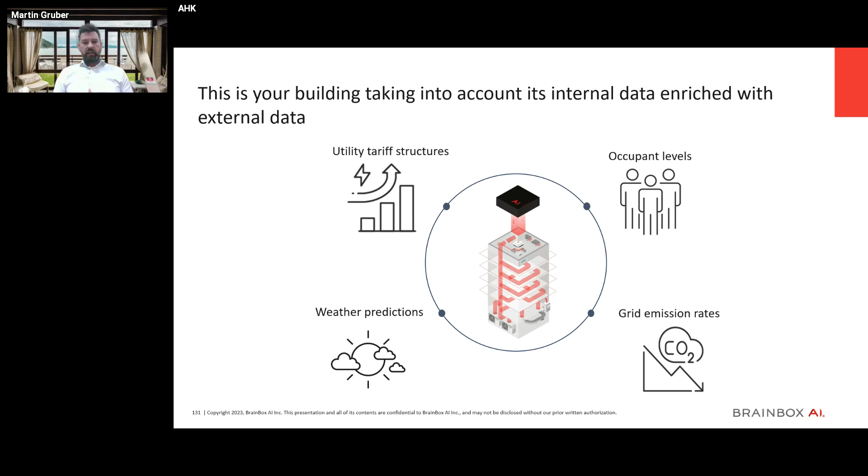Efficient way to get to the temperature which you want to have in the zone. So, for example, if you want to have 21 degrees in your room, we find a way to get to the 21 degrees as efficiently as possible, and that's the key thing. How we can optimize the energy consumption. Next slide, please. By turning equipment on and off if it's needed.

And finally, this has a huge impact on 4 different levels. First, we have the capabilities to decrease the carbon footprint. The standard is between 20 and 40%. Increase the life of HVAC equipment because we use it more efficiently. So that means you have a higher lifetime value.

Improve the thermal comfort of your building, so we can make the building more comfortable and have a better CO2 and humidity level. And then finally, reduce the total energy costs up to 25% related to HVAC.

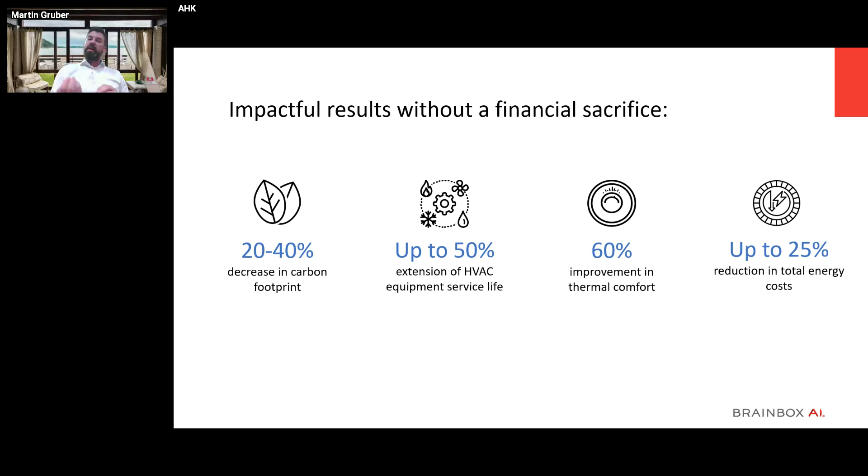Next slide, please. And then another thing, and again, Stefan mentioned that today, it's demand side management. So what we can do is we can use the technology and make buildings work together in order to predict the capability on the grid and do proper load balancing, avoid peak times, and so on and so forth, by shifting the load and the demand accordingly. And again, this is where we use our technology supported by cloud and AI that helps us to make the building more intelligent. Next slide, please.

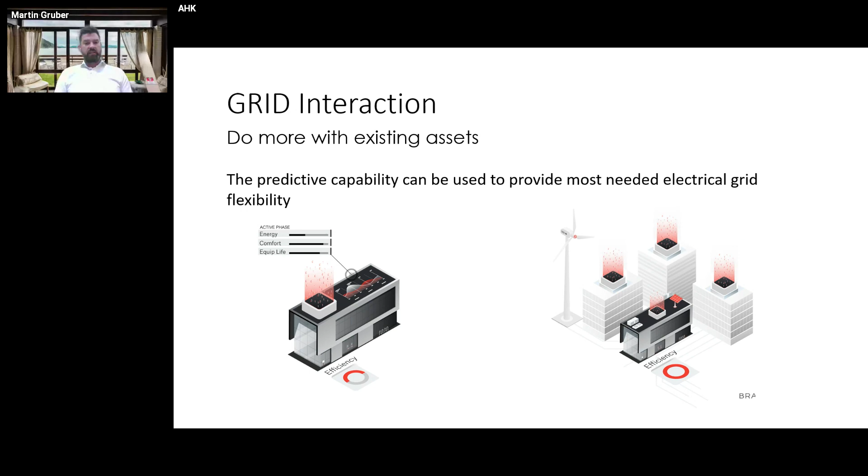And where we do that, I think that's a very significant thing, is we're dealing on a global level, having an impact on hundreds of buildings globally. And we're increasing our footprint heavily, and having headquartered in Montreal, we do have 160 employees focusing on making the world more sustainable with our technology.

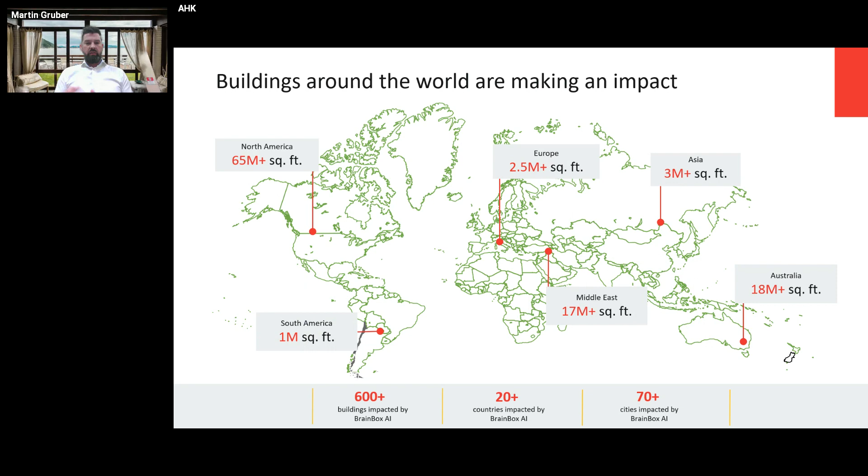And finally, I brought up one concrete example just to give you a feeling. It's a building in London where you see some quite significant numbers, how we can achieve the savings. And the interesting part is, as it is a software as a service, you have no upfront investment cost. You plug in our technology, we charge per square meter which we control. And finally, you're gonna gain the first savings after a few weeks after installation. And that's a key thing as well.

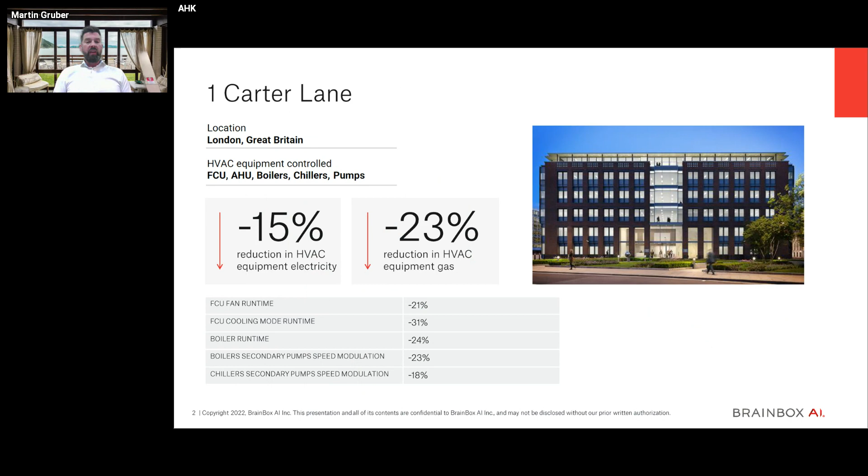What we learned in the last conversations is that speed is very critical. And besides the technology, we want to bring that speed to the market as well to make a fast impact on the buildings. Next one, just to give a feeling, this is what I said before, this is an office building. The right one is a retail building.

So we really see that, especially in the retail space, the cooling demand is increasing. So that's why obviously our impact has to be better and better, as we increase the cooling demand in buildings because of the higher temperatures, we need to have an impact on that, and this is where we can heavily influence. And there is office and retail as a huge gap to fill.

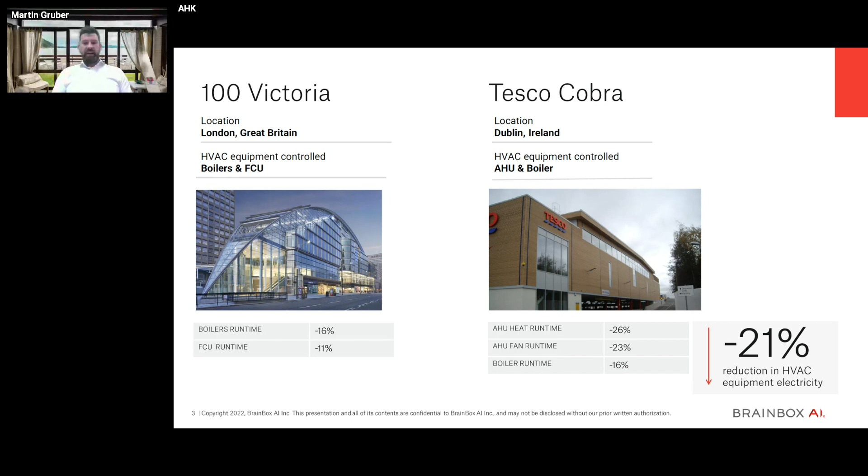And let's make the buildings smarter, greener, and more efficient, starting today.

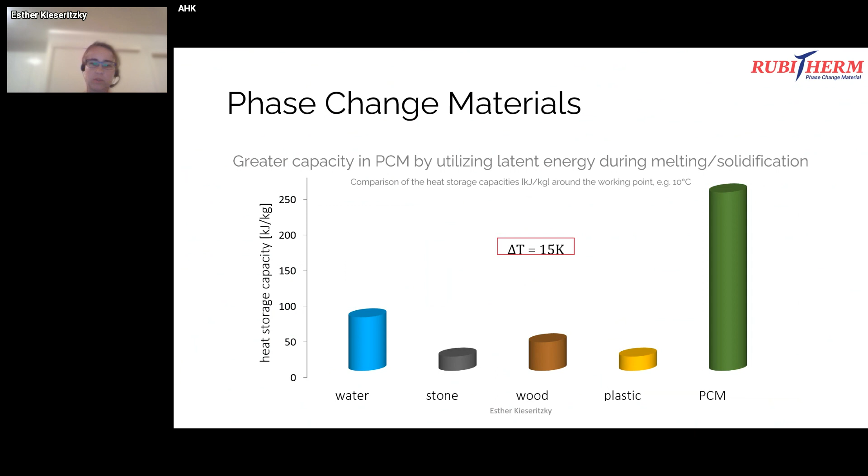So yeah, looking at the kind of materials we are using, in principle, almost all materials have a phase change at some point. What we are looking for here, especially in the range of building applications, is maybe phase changes that happen between -10, -20 degrees and +50, 60, 70 degrees Celsius.

And here we do have two product groups that are usually mentioned. Those are ones of the organic kinds, so they are similar to waxes if you touch them in the solid state. And the inorganic class contains mostly salt hydrates. Well, all of them liquefy during phase change, and as we don't want them just running away from the buildings, we have to encapsulate them in some way.

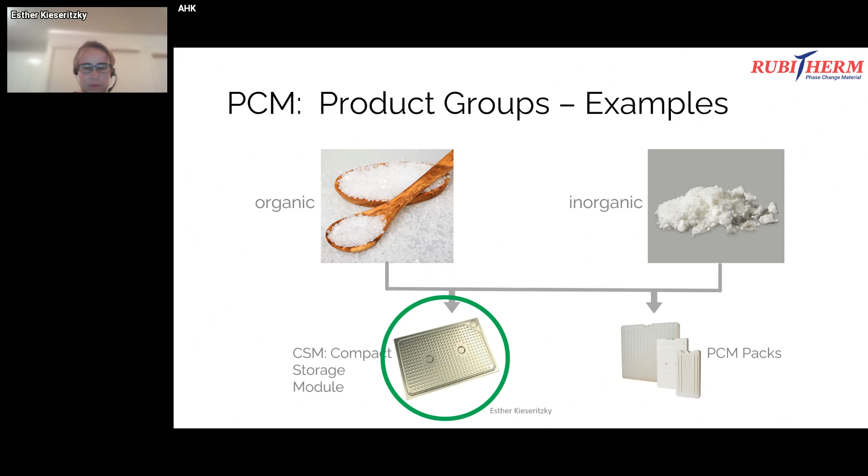And on the lower part, you see on the right side the so-called PCM packs. So it's usually a polymer encapsulation that's also used in buildings, but very common also in the transport sector to keep things cool during transport. And on the left side, you see a very special encapsulation. It's an aluminum metal encapsulation, and we call it the compact storage module. Next slide, please. That's actually the one I will talk about now in some applications. Next slide, please.

So what can we do with these CSM panels, with the phase change materials in buildings? Just look at the picture on the upper half. You have like a stack of these CSM panels. Just imagine you have a melting point of about +21 degrees Celsius. And during the night, when it's cold outside, you suck in cold air to kind of charge these panels.

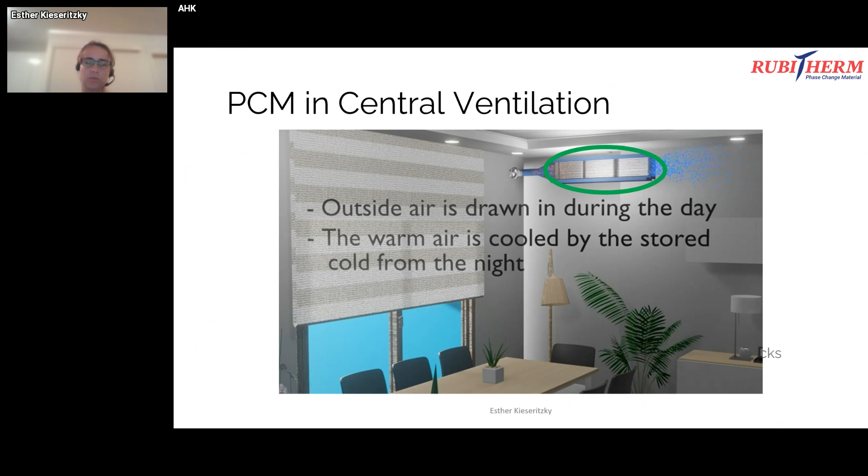They cool down, they solidify, and during the day, when it's getting warmer outside and you want to keep it comfortable indoors, but you still want some fresh air coming in, you can guide warm air over these panels to cool it down to keep comfortable temperatures inside. Next slide, please.

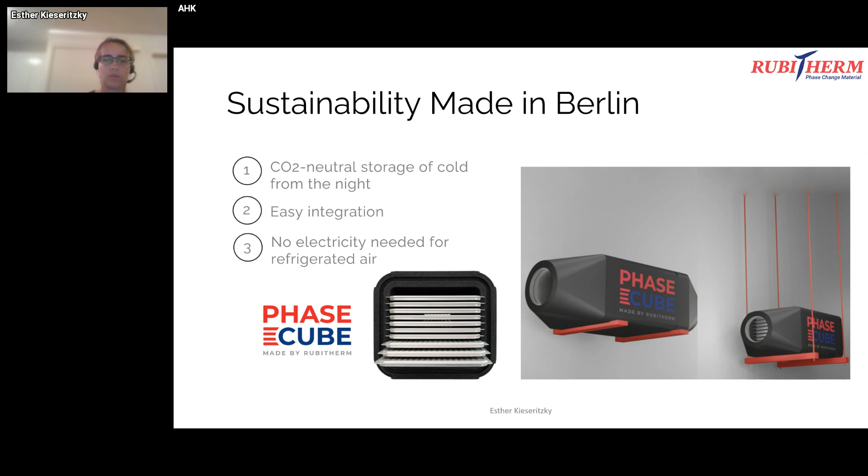So if you don't want to build any stacks, we have some prefabricated stacks here. It's called a phase cube. It holds 10 panels per box and can easily be installed in existing air ducts. But of course, you can also build your own stacks to whatever dimensions are needed. Next slide, please.

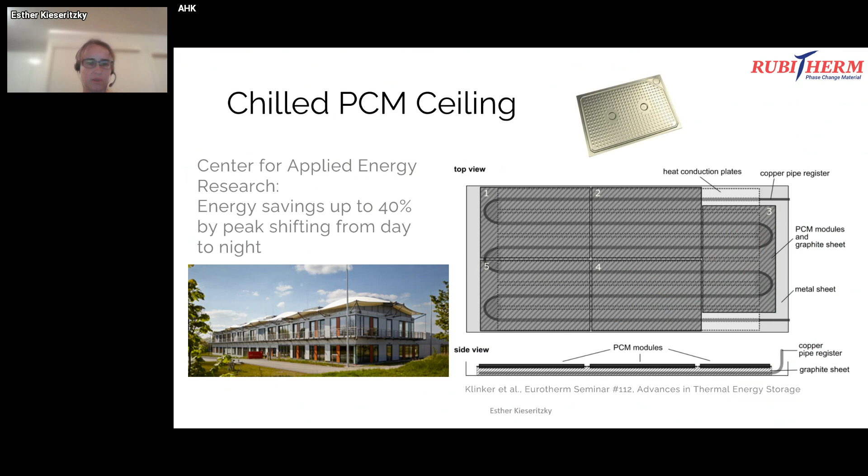This is a different application where the panels are actually used in combination with a chilled ceiling, where the panels were put on top of the ceilings, and the copper pipes with water running through had the possibility to be cooled down with cold night air as well. And that was actually monitored for more than 5 years in a science center in Bavaria, and they could see energy savings up to 40% by peak shifting from the day to the night. Next slide, please.

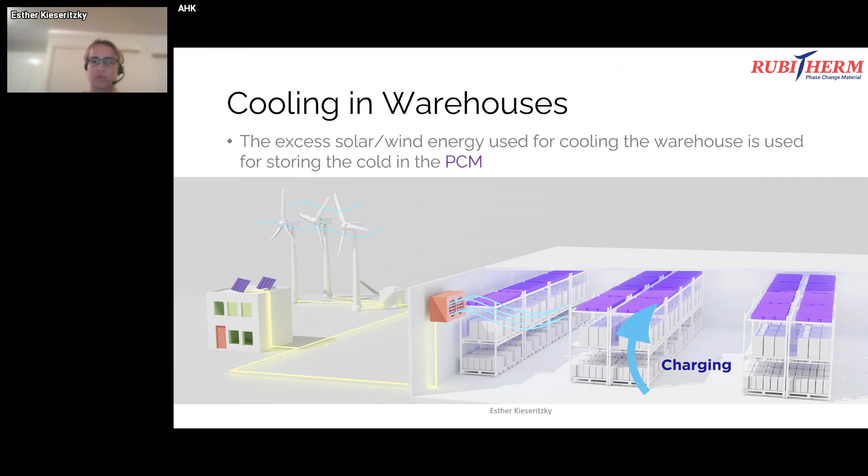So this was kind of on a small scale. One can also go much larger and think of applications in warehouses where excess solar or wind energy can be used to charge phase change materials, here shown in purple on the top. So you use that when you want to keep food at a certain temperature, or also other goods that are temperature sensitive. Next slide, please.

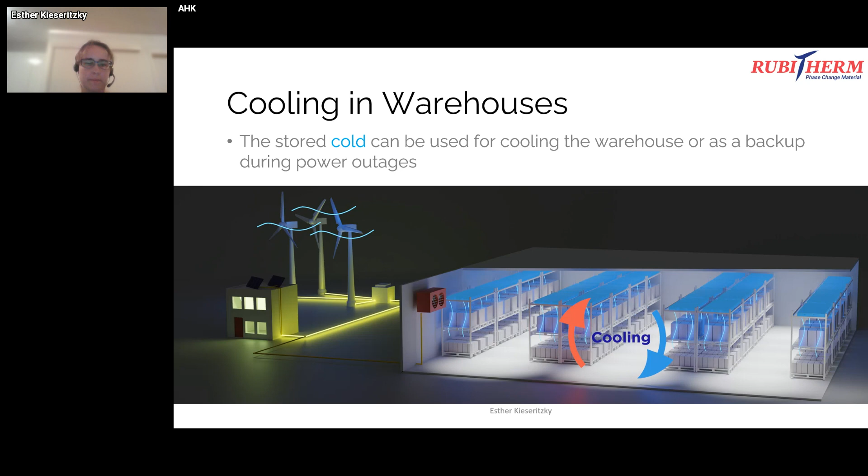And then just, by the example, if you use excess solar energy, then during the day you would charge and during the night you would discharge. Of course, if you use wind energy, times might differ as the wind is usually not blowing much stronger during the day than during the night. This can be used as a standard to do this peak shifting, but one can also use phase change materials as a backup system during power outages. Next slide, please. A similar application is also possible for server rooms.

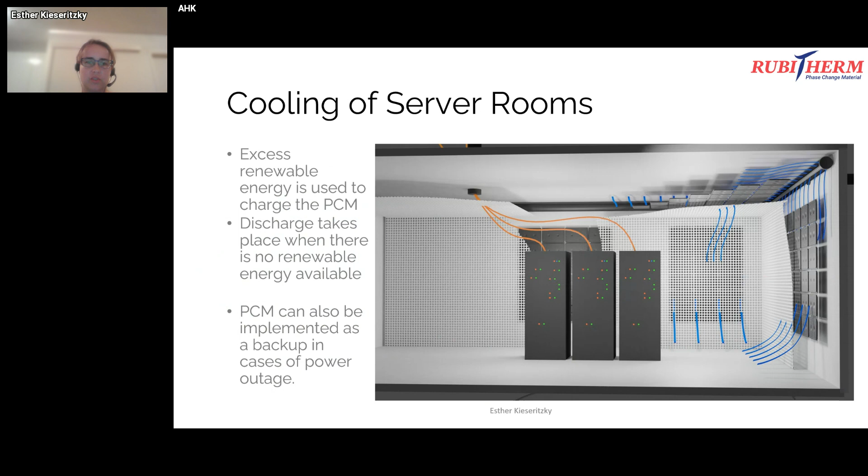It's the same principle as seen before, so we will just jump to the next slide, because everything we saw so far was basically air-guided systems. But if you say, well, I do have a huge climatization system, AC system in my building, and the heat transfer medium is water or water glycol, then you don't want to put some panels somewhere. Then it's much easier if you have a larger storage tank somewhere, and this can also be filled with phase change material. You need a different heat exchanger than you would use for a standard water storage tank. But in principle, from the outside at least, it looks like a standard storage.

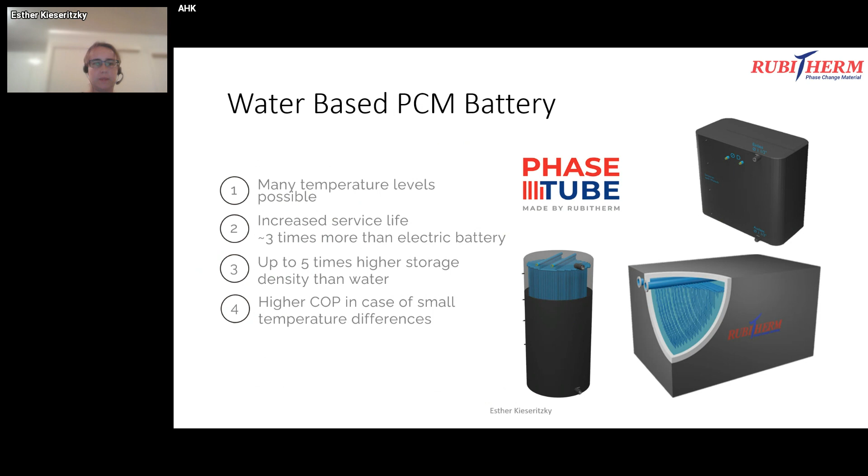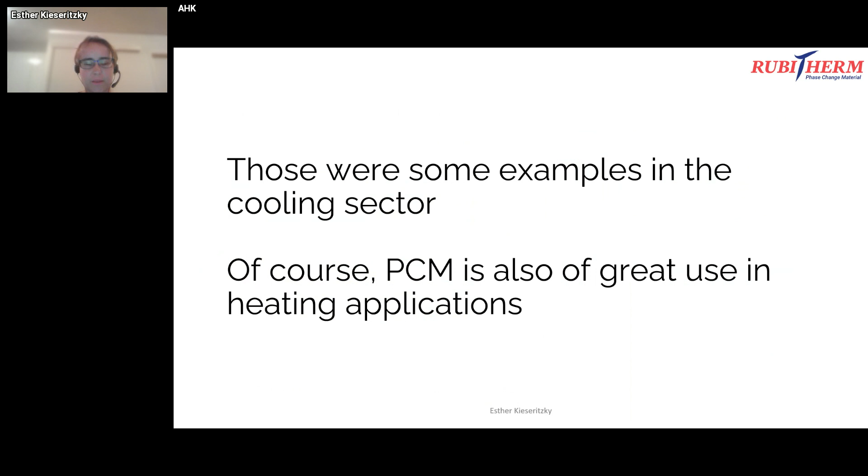Yeah, thank you very much, Esther. That was interesting to learn more about the phase-changing materials we don't see every day, and it's interesting to see what's happening there.